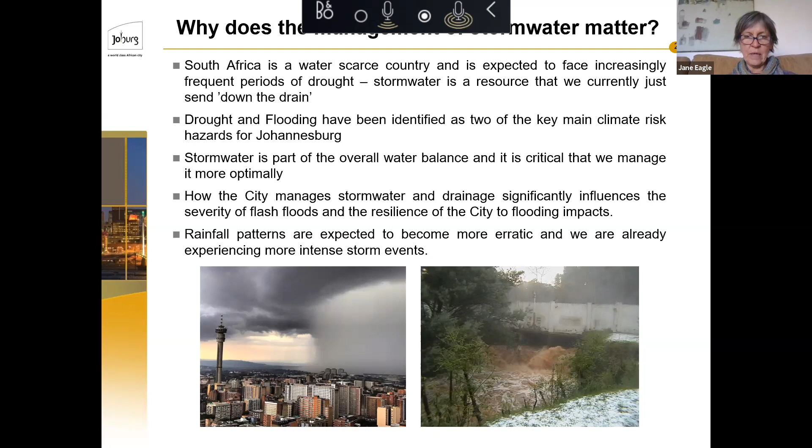Our particular rainfall here in Johannesburg, our patterns are expected to become much more erratic, and we are already getting much more intense storm events that we deal with. So the same rain, or more rain, over a shorter period.

So where have we come from as a city? Well, there's been no explicit acknowledgement of water as central to spatial planning. So we don't plan along water catchment lines. We plan along administrative lines or planning regions which have no relationship to catchments. The hydrological considerations are often overlooked in favor of other priorities.

Especially in a kind of post-transformation, post-apartheid city, where things like mobility, social inclusion, and economic development are often seen as the greatest priorities, and obviously they are, but things like science and environment tend to take a bit of a back seat in relation to that. So the main focus is always on redress, on getting access to water services, and that's the focus.

And we have quite traditional technological approaches to that: pipe water through separate systems for potable water, and then wastewater.

And around stormwater, which is seen as not even having anything to do with those other water streams, for years the way that stormwater has been managed in the city was it was just dumped onto a street, conveyed down a conveyance channel, dumped into a pipe, and then dumped into the nearest drainage line, which was basically our rivers, which were called drainage channels. And when they become unsafe, they say unsafe stormwater drains is how they refer to our beautiful, precious rivers.

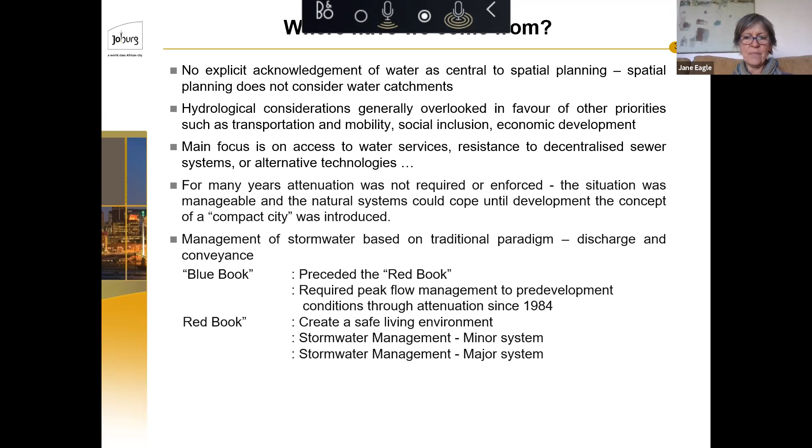And it did require some peak flow management to the pre-development conditions. That was since 1984. And then the Red Book also talks about creating a safer living environment, and it does have provisions to manage the minor systems and the major systems, but it's still very much on traditional lines.

So I always show these pictures. Sorry, the next few slides are really just a series of damning pictures on the consequence of either not managing stormwater or managing it badly, or standards that are not adequate to the kind of stormwater that we are getting and the kind of landscape we are dealing with.

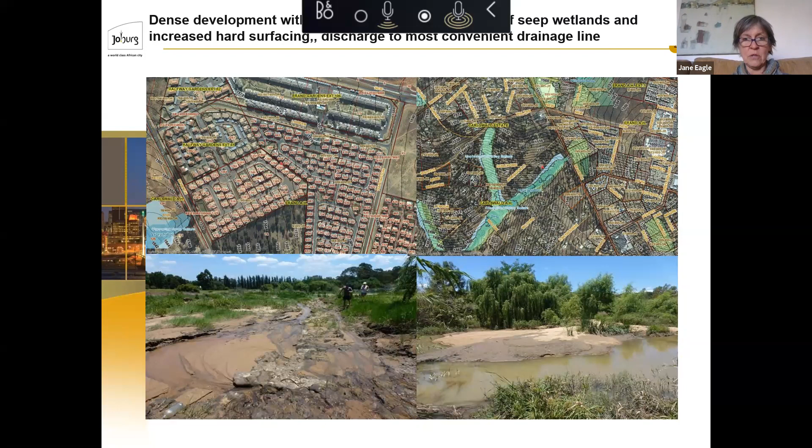Which happens on a regular basis, not a once-off basis. We have dug up wetlands in Johannesburg. I'll show you just now what kind of geohydrology we have, but we have disrupted wetlands, often not recognized. They weren't picked up in the development process. You can see on the top right there, we've got whole townships built over huge seep wetlands.

Because the kind of wetlands we have in Johannesburg, we do have some valley bottom wetlands where everyone recognizes there are reeds growing out of them, but the more difficult, tricky wetlands are the seep wetlands where they're seasonal and often unrecognized until they start digging the foundations, and there's the big black mud and everyone's worrying. They don't always get recognized even in the geotechnical reports, because with all due respect to geotech engineers, they look at it from a different perspective. They look at how can we manage this, what do we need to do to build here. They don't say should we build here.

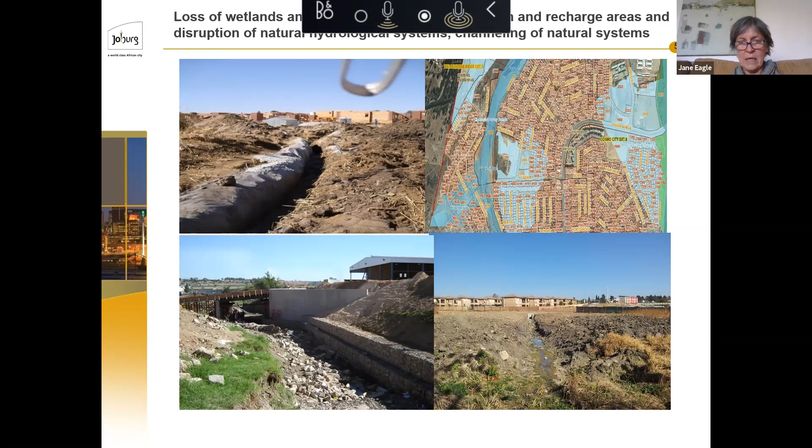So the end result is that we end up having to canalize streams, like the bottom left, that's a poor wetland that's now completely trashed and having walls put to protect the buildings. Or if we've got attenuation, and we don't recognize that we've got to discharge in a different kind of way to protect the downstream wetland, then they just dig a channel through the wetland, and that whole wetland in that picture is now a massacred wetland, which of course is going to erode out and suffer all the consequences.

Also, the other feature that really doesn't get considered - and just bear in mind that I come from a planning perspective, so I see in the planning process how, in a way, there are so many requirements, and yet still we miss through the environmental impact assessment process and the town planning process, both are actually still inadequate. They don't call for sufficient assessment of the total impacts of a development on a site.

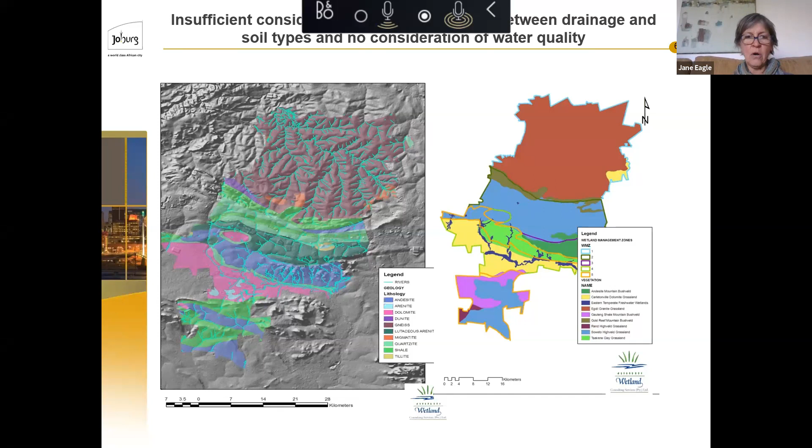So this is just two pictures that came out of our wetland report, and it's just really showing the relationship between the geohydrology and the landscape, and these things have a bearing. You have to consider them in the way that you are developing, and how a development might impact on that northern zone with lots of seep wetlands and lots of baby tributaries is very different from how it's going to impact on a dolomite zone in the south.

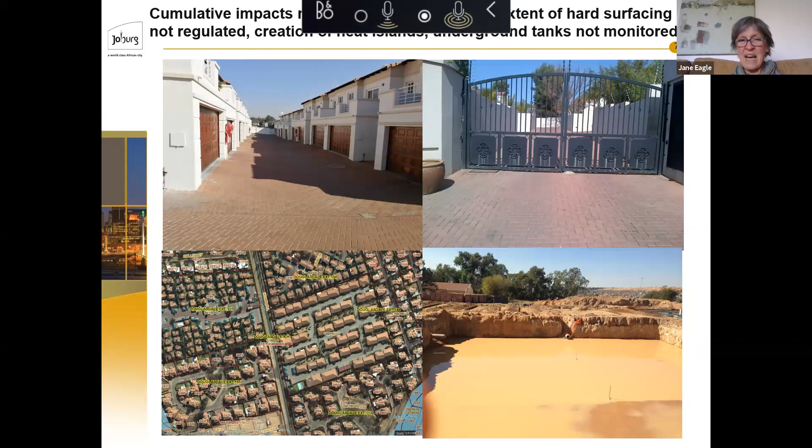Its capacity is already taken up with the construction sediment. It's out of sight, out of mind. No one worries about managing it. So the consequences downstream, we get failure of these systems. They damage our tributaries, and then you get secondary impacts like the sewers fail, and that causes water pollution, or infrastructure gets swept away. Our parks look horrible, like these bottom ones. You know, you're walking through the park, and the park is just the open space where the end of pipe dumps that stormwater.

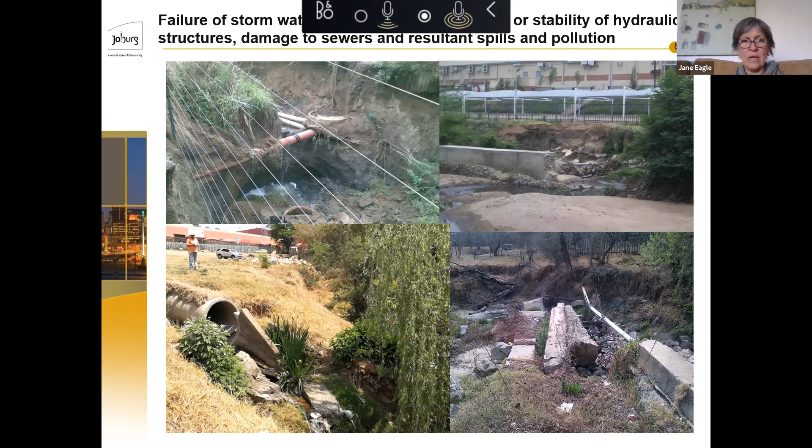That supposedly complies with all the requirements upstream, but I don't think this is fair to have this kind of consequence on the environment, and it's certainly just not aesthetic, if even at very least. And then there are obviously consequences for people's lives.

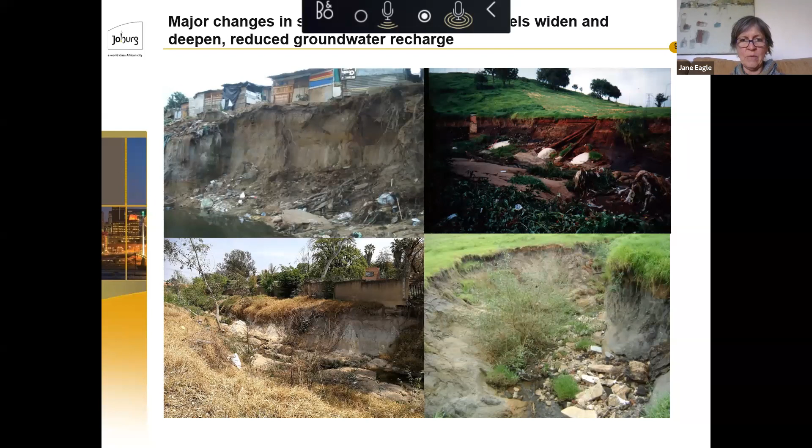We get this kind of devastating erosion and threats to homes, whether they're formal or informal. Obviously, some of these might be in the floodplain even, but even those which are deemed not to be in the floodplain would suffer. These are just more pictures to show the devastation on the environment. It's not sustainable. It's not what we should be doing in the way we manage stormwater.

We send a lot of sediment down, and sediment's becoming a huge problem, particularly in Joburg. I'm sure it is for many cities. But sediment has a lot of consequential impacts, not only on ecosystems, smothering breeding grounds of fish, but also it somehow finds its way into the sewers. And then a lot of our blockages of sewers are actually due to sediment ingress.

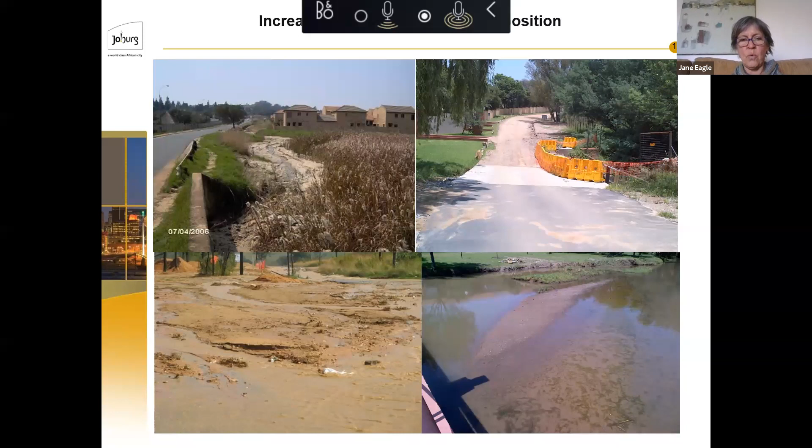So sediment is a very strong feature, and you'll see later even in our bylaws. And it links very strongly to runoff—its impacts start right from the day you clear a site. The impacts are immediate. They are not something you can wait to manage, because they start from day one that you start to transform a site.

And here's just the loss on the biodiversity, the pollution loads, and all the other nasties that stormwater carries very effectively into our rivers through the drains. And it hasn't been mandatory by any means in Johannesburg to look after the quality of your runoff. So these are the consequences.

And then obviously the flooding. These are real events, real flood events that we've had in the last 2 or 3 years. These were by no means off the charts events. I think the top one with the combis was estimated to be a 1 in 200 year occurrence, but some of the other floods here would be the 1 in 20, 1 in 10—not very severe floods—and properties get damaged, and people lose their lives.

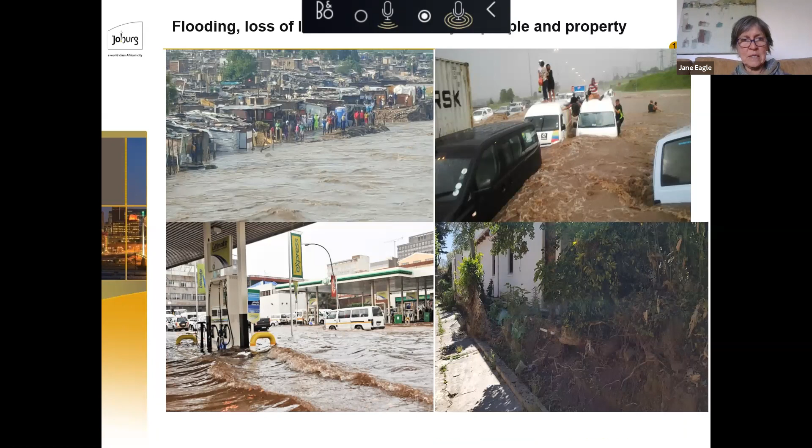So here are a few case studies of some of the areas in Joburg where this thing comes together and causes a problem. And this is my link between really spatial planning and the consequences of not managing stormwater, and then how it all comes together, and it becomes a management problem at the end of the line.

So just very briefly, I'll speed up, but this is a ridge area. They just built over all the ridges, dumped the stormwater in these tiny drainage lines. There was no thought for how they were transforming the runoff of the ridge, and then the consequence is quite evident. You just send it all down that road into a drain, and it lands out in this park and causes that big channel and damages the sewer.

It's just not fun. Here's another one, a big industrial area upstream, no attenuation for properties under 8,000, of which there were many. So in the end, you get a vast complex of industrial development that wasn't attenuating, and even those that were, not to adequate standards.

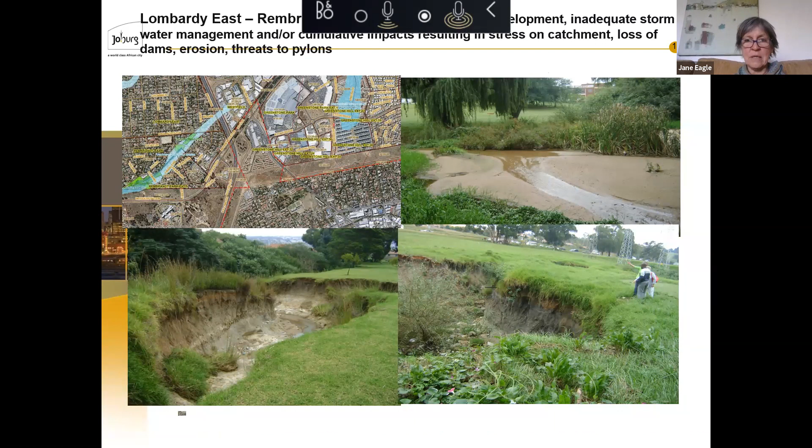And then this is a river system downstream that had wetlands, and that's supposed to be a dam. It's completely smothered, and then it actually starts to threaten pylons and power supplies and all those consequences.

Here's another one where in this case it's very much a case of encroaching on the watercourse, not respecting the natural hydrology of the site, digging up the wetlands, only taking floodlines into account, not taking the whole riparian zone into account. And again, this is not an extreme flood event, but we've covered springs up. We just have not listened to the hydrology of the landscape.

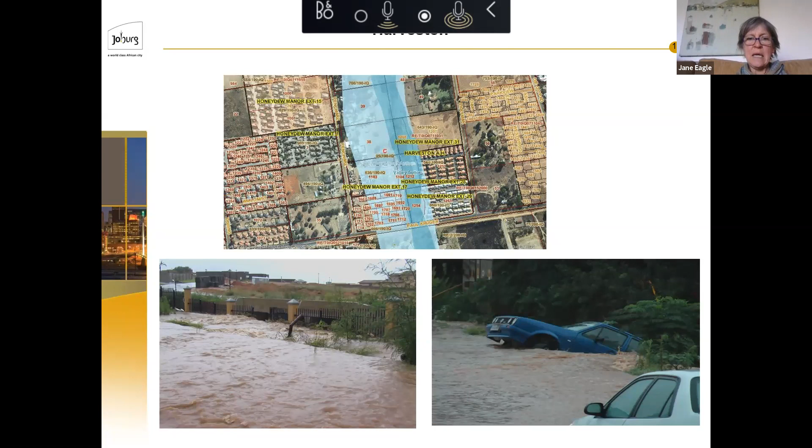It's been totally ignored in the planning of that. So that goes beyond just the stormwater issues. It's about how you respect water, and you build an understanding of the natural hydrology of the site into your overall design, so that you don't pick up consequences.

I'm a bit naughty showing this slide, and I'm not quite sure if I'm allowed to, because I've taken the top slide from a report done by Digital Soils Africa. I have acknowledged them here, but this just to illustrate the kind of pressure that we're even facing today. This is not then and now. We are still in the trenches trying to get this balance between the need for development, for densification, for economic development, and respect for the water processes of the landscape.

The top left isn't that clear, but there are different hydrological response zones. This came out of a hydropedology study looking at soils and water flows. The blue on the western side of the site is actually a huge seep area, called the responsive zone. Then there are various recharge zones and interflow zones for the rest of the site. The moral of the story is the site is full of water. It's a very wet site.

On the right is the concept that I can almost be assured will happen on the site - it's the other way around. The only picture I could find from LinkedIn is this concept of the new development, a kind of franchise development with an artificial lagoon. The lagoon itself, if you switch that picture, would land almost largely in that saturated blue zone. So we'd be digging up a natural wetland effectively to replace it with this artificial lagoon. Lovely development, I have to say - I've been to one of them. They're wonderful, you know.

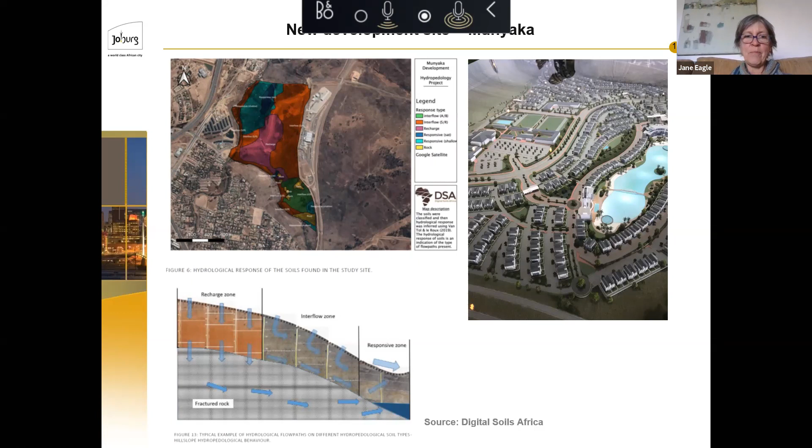You've then got to know the volumes, because you can no longer just plan stormwater by looking at the surface landscape and traditional one-size-fits-all calculations of stormwater and catchment. If you miss this water and displace it, your calculations are totally out, and then everyone wonders why the system fails. I raised this because it's an interesting case study we are grappling with at present, which brings together things way beyond just replacing a pipe with a swale. It's really about how we do holistic development that considers the broader landscape, and it's really, really difficult to do.

Okay, so back to Joburg, to speed up. We really needed a paradigm shift - we still need a paradigm shift, and we are starting to make that shift. I think there wasn't a linear route here. We did policies which maybe had other motivations at the time, but that served us well.

So we started with a catchment policy in 2009 that was really trying to regulate land use along rivers and floodplains and stop the ongoing encroachment into floodplains. That was its primary purpose, very much trying to protect the floodplain. Then shortly after came the Wetland Protection and Management Plan and an audit of all the wetlands in Joburg, because we found the provisions to protect and manage wetlands only kicked in when you knew the wetlands were there, and half the time they were missed.

So we tried to have an audit as sort of to balance out, if we get a development site, we can say you're likely to have wetlands, you need to go and actually do some more investigation. And it also was very strong on stormwater and how you need to manage stormwater differently for your different wetland types.

And then we moved on to hydropedology, which came out of work that the Water Research Commission had done, which just made me very excited as a planner, because it seemed to me it takes it away from just the site-specific approach, and it does look then more broadly at the total landscape. And we have a lot of sites where water pops up in a little seep wetland, but you don't really know what's driving that water.

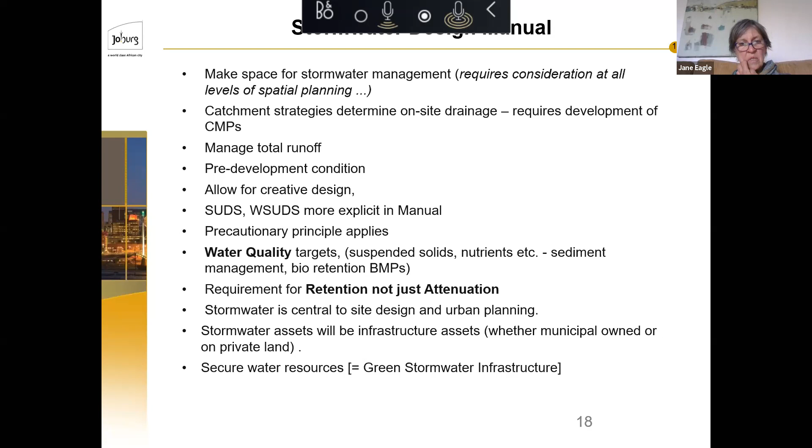And then we're also saying we have to start tightening up on capturing any stormwater management - even SUDs, even a swale, should be part of the infrastructure assets that are maintained and kept and accounted for, because we don't want body corporates who think the attenuation was actually a sand pit and fill it up with sand for their kids, which are real life things that happen.

So just a few principles, I'll run through them very quickly. Storm as a resource, catchment recovery, water quality - I've already, these are all self-evident. I'll leave you to read those, but these are principles that we are saying must guide decision-making at all times. And the environment is a stakeholder. You have to consider the receiving environment. It's no longer that thing down at the bottom of the catchment.

So our stormwater design manual, we see it as a living document as we get research - the kind of research that Kirsty and them are doing, and University of Witwatersrand and others - and best practice anywhere in the world that helps us know what works, what doesn't work. Some of the research that's been done on permeable paving, for example, by Bill Hunt, all these things help us update, review, and add to the manual. So we're saying it's not cast in stone. It's something that we will consider to see. It's a bit of trial and error to some extent, and I'm afraid to say engineers hate trial and error because they have public liability risks.

If they design and it fails, that's one of the biggest problems around the manual resistance: if we try your green infrastructure approaches and your new approaches, what if it fails? Who bears the brunt of the public liability and any costs and comebacks? So that has been one source of resistance.

So some of the challenges we've had around the manual, just captured on the slide, is skepticism. It can work elsewhere - well, it works in Norway, but it can't work here in Joburg, we're different. Oh yes, it can work in Cape Town, it works on that golf estate, but not in our low-income housing, we're different. So there's been a lot of skepticism.

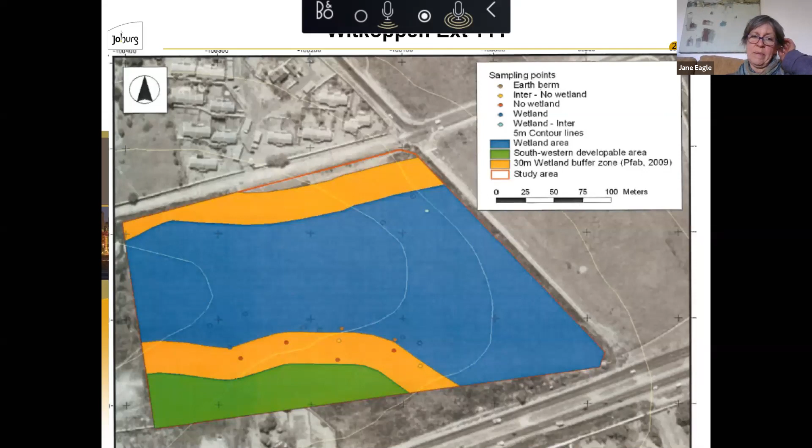So I threw out, not knowing if it was a realistic challenge, to the engineers: if you can mimic the water to the primary wetland, we'll even let you build on the buffers, but the wetland itself must be sustainable.

So they came back with a concept plan which didn't look at keeping the entire wetland, but the core wetland was going to be in place. But then they changed it further because they got some hydrology studies done which showed that there was so much stormwater being dumped from the surrounding developments on the site that it would literally have just eroded out. So they said it can't cope, there's so much water coming onto the site.

The only hope for this wetland is to actually transform it - to almost remove the soil, create these pockets of attenuation dams, and then recreate a kind of wetland around those, which is this concept plan.

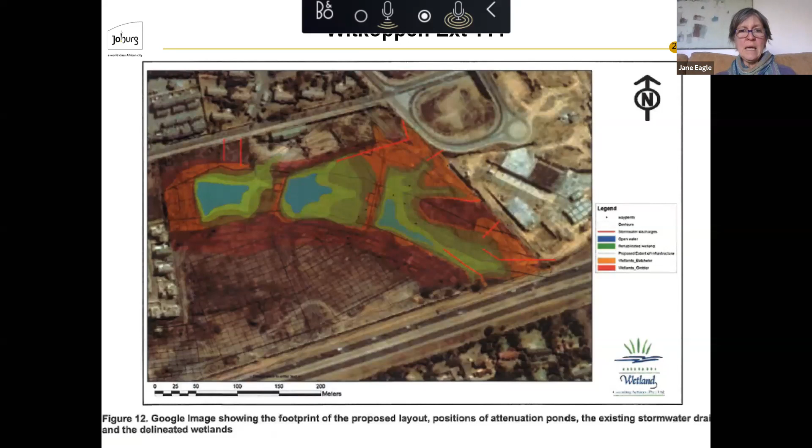So we'd actually agreed to this plan, which we felt was a compromise we had to live with, and at least we'd get some kind of ecosystem, some management of the stormwater. We'd prevent the flooding downstream from the site, and we wouldn't export the damage further down the catchment. And then this is what it looked like in terms of the planning site plan. We signed off on this thing.

But the moral of the story goes further - what happened in the end is they took their professional team on site, and on site, they started to even change their thinking about this. They asked some questions. It was cost that drove them, because they were going to have to excavate at huge cost and then put the soil back. That is a very costly business.

So the wetland guy actually said to the engineer, could we not achieve the same attenuation by raising the sides of the wetlands?

So it means the wetlands will be flooded for a longer period every year. They'll be wetter, but we achieve the attenuation. We don't have to massacre these wetlands and excavate them out of existence. We must work with them.

And then they've made a way of actually mimicking water through these wetlands. And then also for the major storms, it's just the way they landscaped it, the major storms actually bypass the wetland. So what we got in the end was that about 60 to 70% of the original wetland was actually left on site intact. It remained on site, it was modified.

So there was re-engineering, but re-engineering that has resulted in there have been a few critiques. We'll talk about those just now. There are some management issues, but really, as developments go, it's a very sustainable solution.

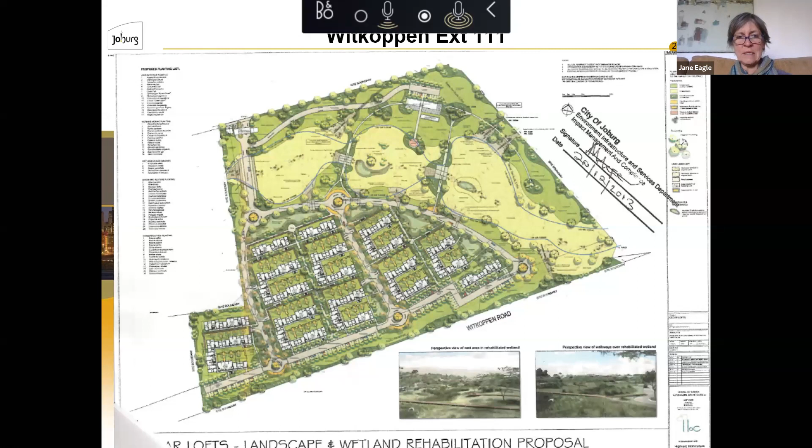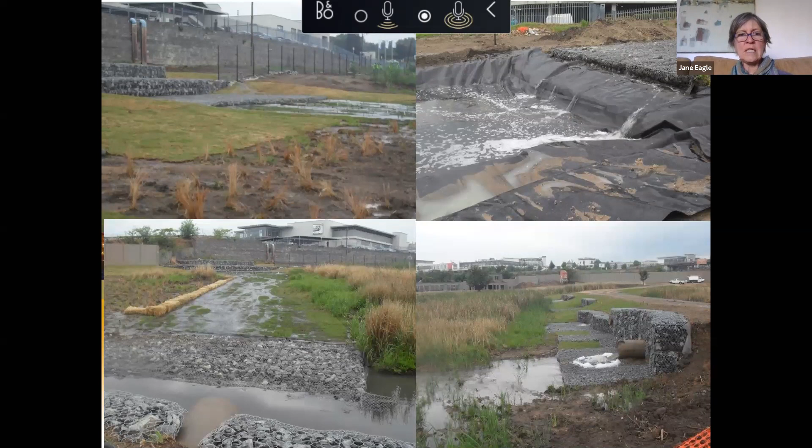So what it was doing was saying this wetland never got its water in a single discharge point. It got spread out water, lateral flow. And so we're going to try and distribute that flow and disperse the flow to mimic how the wetland would have got its natural runoff.

They had to solve a few practical problems where their structure was eroding, and they had to again mimic the natural hydrology, which would have had a clay layer, which would have forced the water back up. So they had to put in some plastic to do that, and then they planted on top.

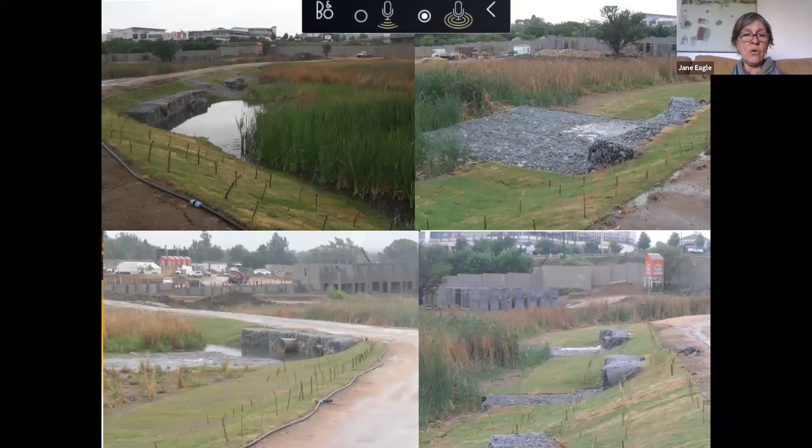So at the end of the day, the thing looks very green, but the other message I like to get across is that it was engineered very carefully, but thinking about the principles of the wetland, of the natural hydrology, of the natural soils. How would those plants have behaved? How could they mimic that best to impact least on the site and also to make it the most resilient and stable site, while managing these enormous volumes of water, which were the result of past stormwater lack of regulations.

So the water feeds even through their road crossings. They do have attenuation ponds on the side, but they even had to mimic flow under their buildings. So where lateral flow would have fed that big wetland, they had to change their foundations to allow for water to go under their buildings. So this whole landscape has water systems feeding through and under it into the wetland.

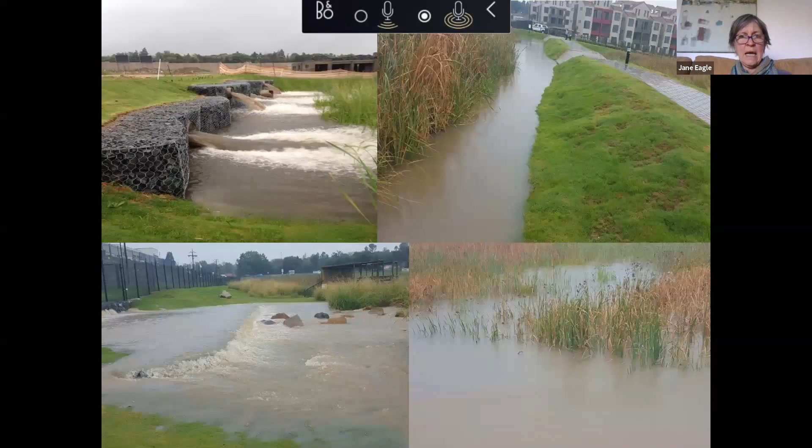And there are pictures of this site after a 3-day non-stop rain event where the core wetland was still intact, did not wash out. It was inundated for quite a long time, but then that drained and it came up for air. We have not seen any severe erosion whatsoever.

They have got swales, which they've planted up, to mitigate some of the immediate runoff from the buildings. But essentially, it's a very livable development, and they got their densities, they got massive densities on the site. It's sold very well, and it's a very aesthetic development with this beautiful wetland in the middle of it.

So, you know, it can be done, and it can be integrated, but it takes a bit of effort to make this happen. And I've just realized I actually should have updated that, I've got some even more recent pictures of some of the stormwater swales, etc. So maybe I'll send Kirsty the one with just a few additional pictures, which just show some of the smaller real SUDS devices that they put in where runoff has gone into a rock-lined sort of pond that then seeps. But this is the main structure of that wetland system.

So it's just a very nice example of how you can really integrate SUDs at a nice scale into something that satisfies your needs to densify your city, grow your city, and not leave the environment in tatters. Thanks, Kirsty, that's my story.